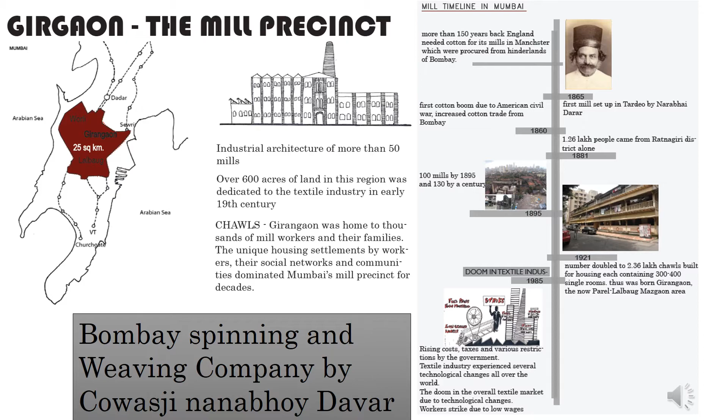Redevelopment of mill lands: in 1990, DCR 58, that is Development Control Regulation, came into existence. The mill owners were allowed to change the use of the mill from industrial to residential or commercial.

The map shows the location of 52 mills in Girangaon that establish a unique fabric of this region. Mills, workers' housing, and worship centers are some of the dominant elements in the urban characteristics of Girangaon.

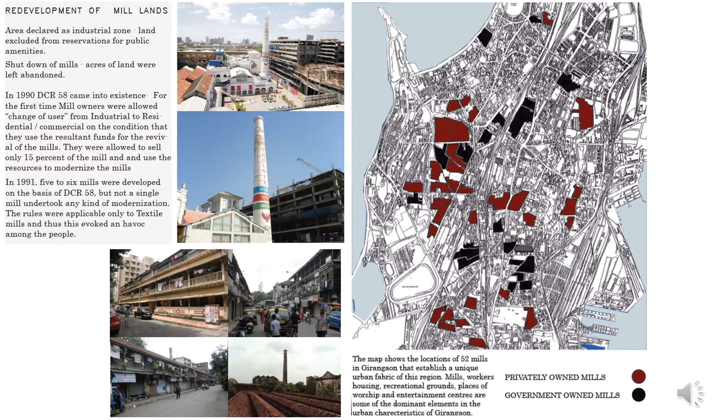The project takes into consideration a district that covers 7 mill lands in the heart of Girangaon. This region lies between two of the most important artery roads in Mumbai, the Eastern Freeway and Eastern Express Highway. Out of these, New Hind Textile Mill and India United Mill Number 5 are already developed. The other mills have individually proposed plans.

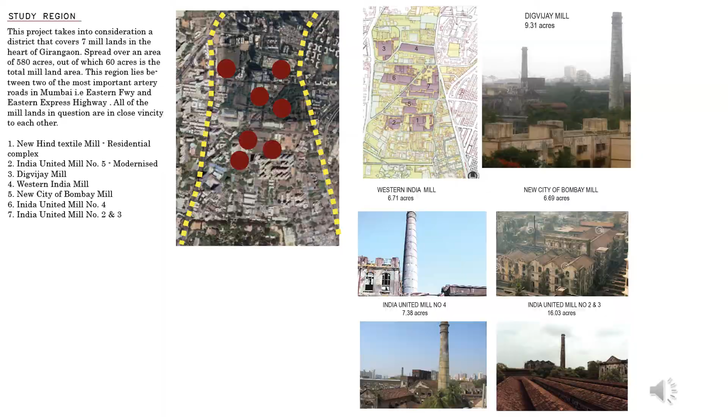Why India United Mill 2? It has a large site area as compared to other mill sites. It has a strategical location to railway stations and roads. It is ideal for a public space due to its environment. It is the first mill structure to be part of Mumbai's heritage list.

Project feasibility: heritage conservation is a major factor in knowing about the architecture of a particular time period, as well as in promoting tourism. The 80-plus-year-old mill precinct is almost in ruins. The need to conserve it becomes relevant as it is one of the best examples of Victorian mill architecture. As both India and the mill have a history on textile, they could both be combined in reviving the mill precinct.

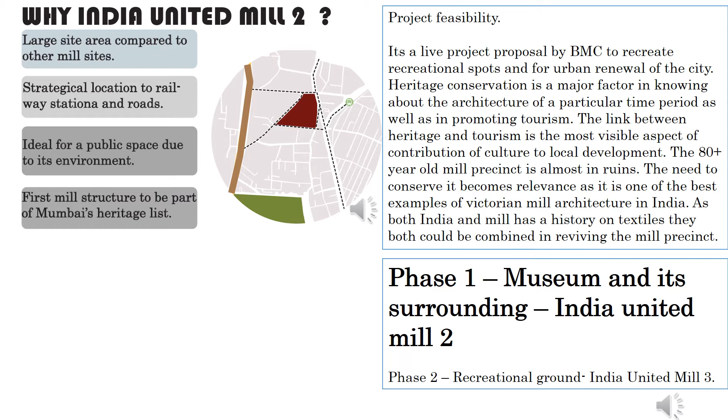It is a live project proposal by BMC to recreate recreational spots and for urban renewal of the city. The development is under two phases: Phase 1, museum and its surrounding, India United Mill 2; and Phase 2, recreational ground, India United Mill 3. The project takes under consideration phase number 1.

Aim: the aim of the project is to explore the possibilities of adaptive reuse in converting an old mill into a recreational zone along with the textile museum. Objectives: to convert the existing mill precinct into a new neighborhood which has its own distinctive new characters and ambience along with the retained character.

To identify the possible structures that can be retained in the mill precinct. To assign new uses for the retained structures. To identify the new design language that can be incorporated with the existing structure.

Scope: the study aims to cover the conservation of the textile mill and adapting it to a recreation zone. It also includes designing of spaces which will educate people about textiles but also connect them to textiles by means of workshops and activities.

Limitation: the design should adhere to the existing site conditions. The project does not go in depth about the structural system and details. The detailed planning would be limited to 10,000 square meters. The new design language should go with the existing ones.

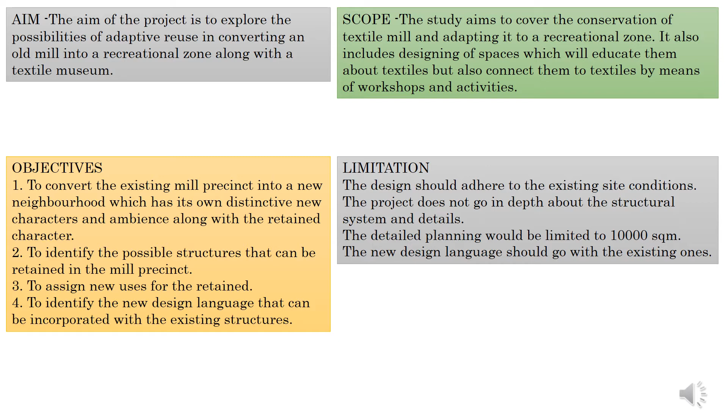The site is located at Kalachowky, Byculla East, Byculla, Mumbai, Maharashtra, India. It is located at a mixed use area approximately 900 meters away from Cotton Mills railway station. The adjacent road has a minimum width of 9 meters.

The Tukram Bhikaji Road connects to Eastern Express Highway and the Rambhau Bhogi Marg connects to the road that leads to Eastern Freeway. The nearest landmark is Mumbai Central, which is 3.8 kilometers away, and the Chhatrapati Shivaji Terminal is 5.7 kilometers away, followed by the Chhatrapati Shivaji Airport, which is at 15 kilometers from the location.

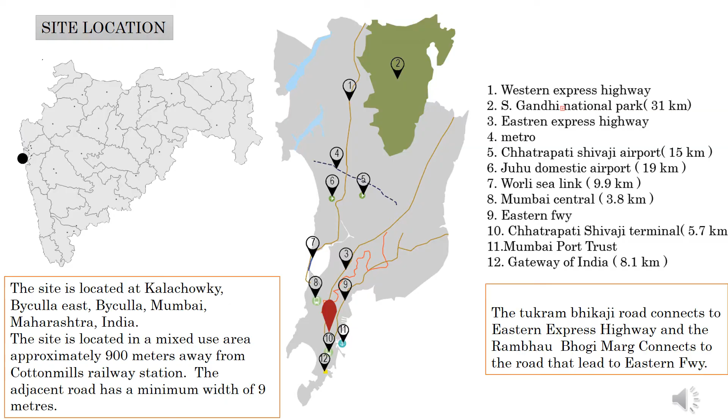India United Mill 2 and 3 was earlier known as India United 2 and India United 3 respectively. The site consists of mill structures of 80 to 25 years of age. It is owned by Brihan Mumbai Municipal Corporation. The site is significant for its historical, social, and mill culture. The structures are done in colonial industrial architecture.

The site shows signs of water seepage, broken windows and doors, damaged load bearing walls, roof leakage, damaged beams and columns. The site is encroached by laborers and destroyed due to heavy wind and rainfall.

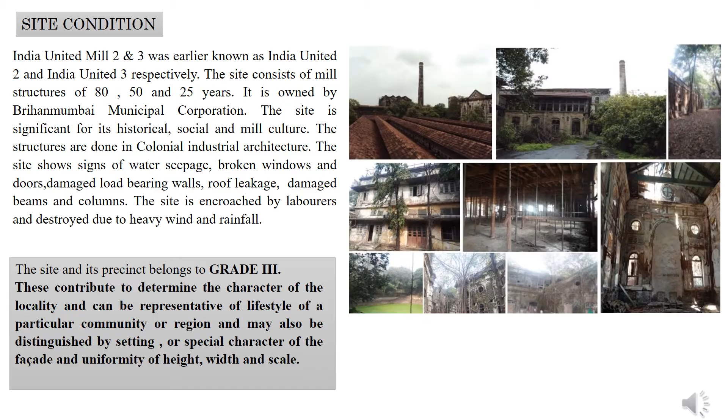The site and its precinct belongs to Grade 3 according to Heritage Conservation status. These consist of buildings that determine the character of the locality and can be representative of a lifestyle of a particular community or region, and may also be distinguished by setting or special character of the facade and uniformity of height, width and scale.

Site and surroundings: the site is surrounded by other mills of similar typologies, chawls and mixed-use buildings which have been adapted from the existing ones. According to the Master Plan of Greater Mumbai, the site and its surroundings belong to the urbanization zone with commercial and mixed-use development.

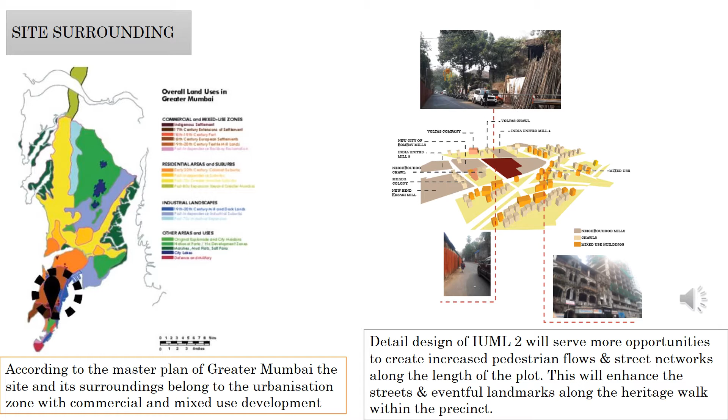Right now, the site and its precinct is pretty much abandoned with very little activity and pedestrian flow. The detailed design of India United Mill 2 will serve more opportunities to create increased pedestrian flows and street networks along the length of the plot. This will enhance the streets and eventful landmarks along the Heritage Walk within the precinct.

Sun and wind analysis: the predominant wind direction is from the northwest, and towards that part of the site there are fewer buildings of height, varying from 4.9 meters to 9.8 meters. This allows more breeze to enter the site.

Noise analysis: the junction at the southeast side is a point of high traffic as it is where most of the retail shops, vendors, and mixed-use buildings are situated. But the abundant vegetation on the site reduces the effect of the surrounding traffic.

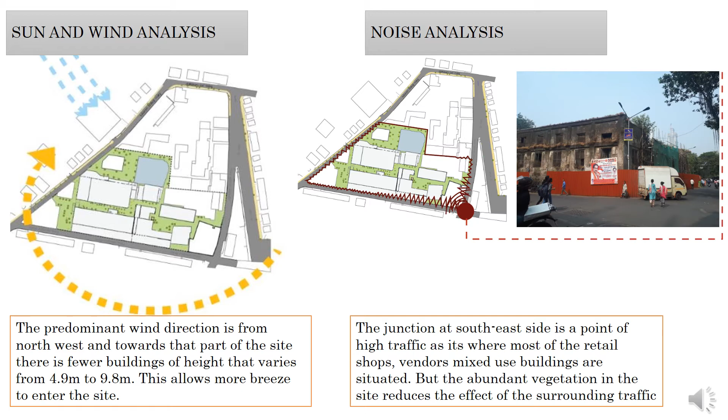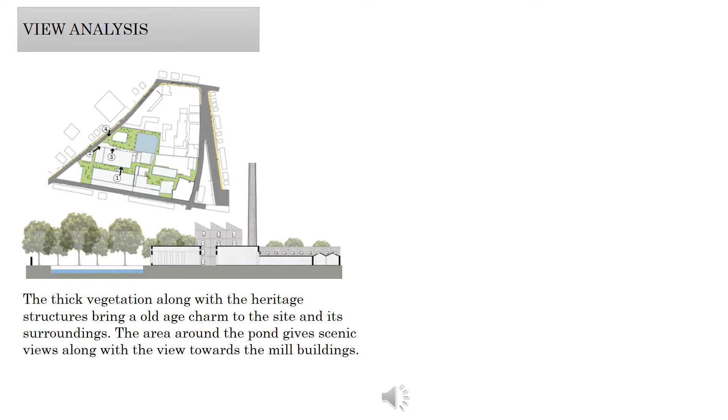View analysis: the thick vegetation along with the heritage structures bring an old age charm to the site and its surroundings. The area around the pond gives scenic views along with a view towards the mill buildings.

The main entry to the site is from the southwest side, and it has two other service entries from the northwest and southeast. The buildings are all oriented in the east-west direction, which calls for the least amount of openings on the east and west side.

Godown, offices, ring and spinning, weaving, semi-auto loom and sizing department, baling department, chimneys are the few functions for which each block is assigned. All the blocks are huge and mammoth in size, and each of these areas varies from 500 square meters to 8,000 square meters.

Each block consists of a set of lattice columns and beams which vary according to the size of the machineries that is being kept.

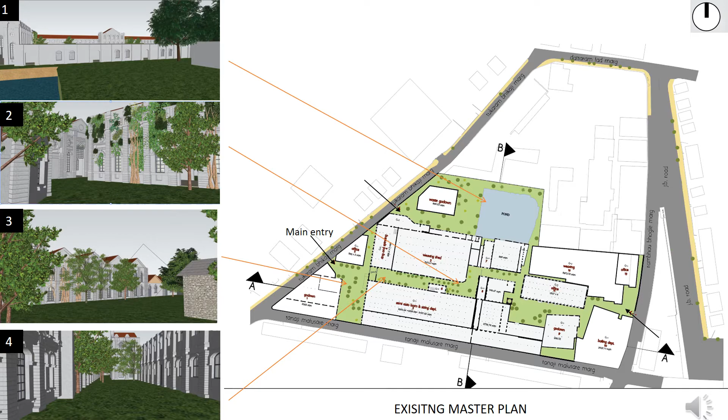The section AA is from west to east, cutting through Godown, semi-auto loom and sizing department, Godown, and baling department. The section BB is from north to south. Each floor height measures 4.8 meters, and the chimney goes up to 45 meters.

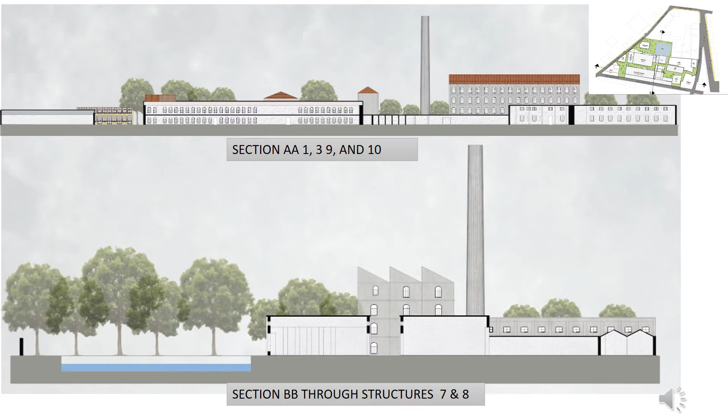The most common type of roof found is the M-shaped roof. The other varieties are the north light and flat roof. The Victorian style facade consists of elaborately decorated columns and windows.

The window height ranges from 1 meter to 3 meters. The width mostly is 1.5 meters. The height of the windows from the floor varies from 50 cm to 80 cm and 2.2 meters, depending on the functions of the block.

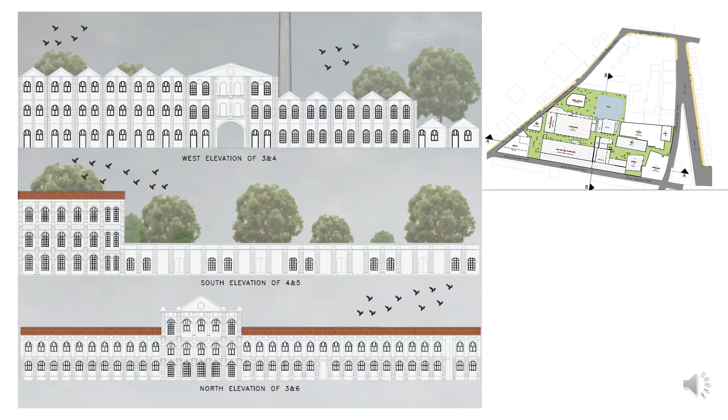The site consists of about 110 trees of height varying from 3 meters to 25 meters. Ashoka, Peepal, Indian cherry and Umber are the trees in more numbers. The other varieties include Putranjiva, rain tree, Ratangunj, Bokeda, Ficus racemosa, Jungli badam, etc.

The most commonly used materials are double glazed glass for windows, wood for rafters, Mangalorian tiles for roof, plaster and stone for walls, and cast iron for columns, windows and door frames.

The suggested framework by INTACH-Gujarat was used to analyze the heritage status of each building. It consists of 5 broad categories: context and location, significance, age, unique architectural features, and state of conservation, and each category has a certain amount of value towards it.

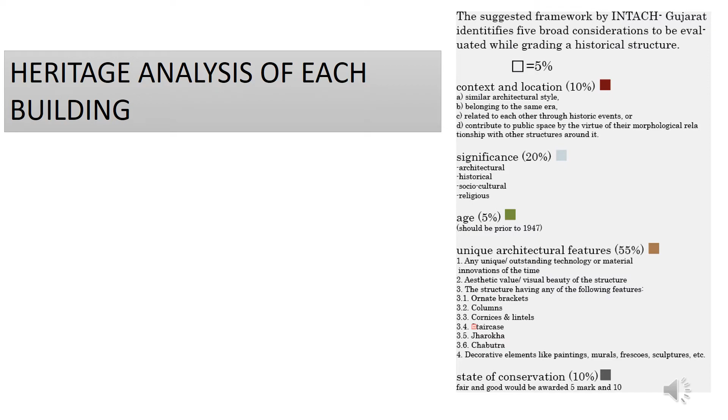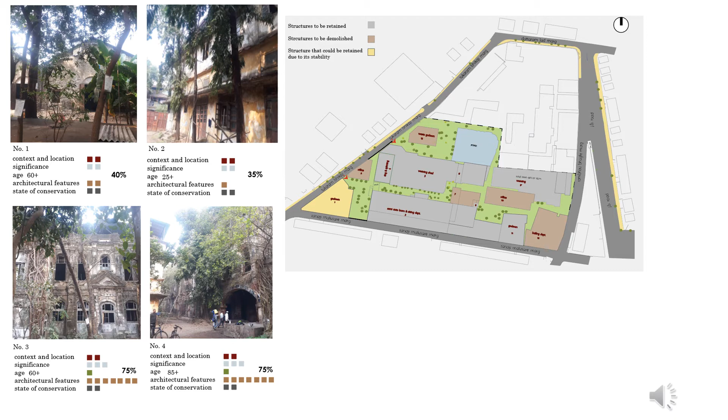Structures 1, 2, 3, and 4 were analyzed, and it was found that 3 and 4 were of immense importance. Structure number 3, which is currently the semi-auto loom and sizing department, is about 60 years of age, and structure number 4, the ring and spinning structure, is about 85 years of age.

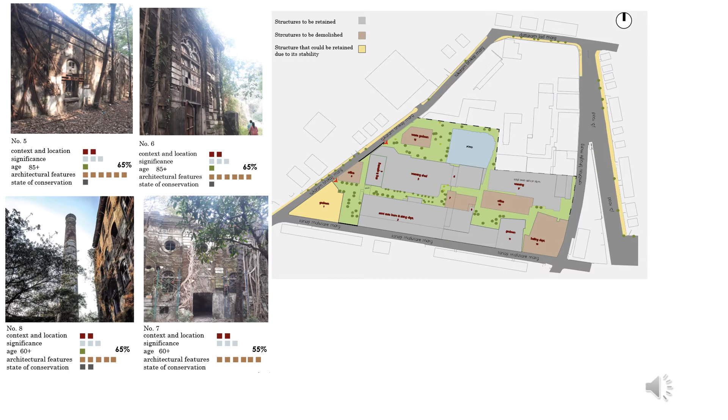Among the structures 5, 6, 7, and 8, structures 5, 6, and 8 were of importance. The structure 5, currently the weaving shed, is 85 years of age. The chimney, that is structure 8, is about 60 years of age, and structure number 6 also is about 85 years of age.

Structures 9, 10, 11, 12, and 13 were analyzed, and from that, structure 11, which is currently the godown, was the only one to be retained. This is because all the other structures were in a poor state of conservation.

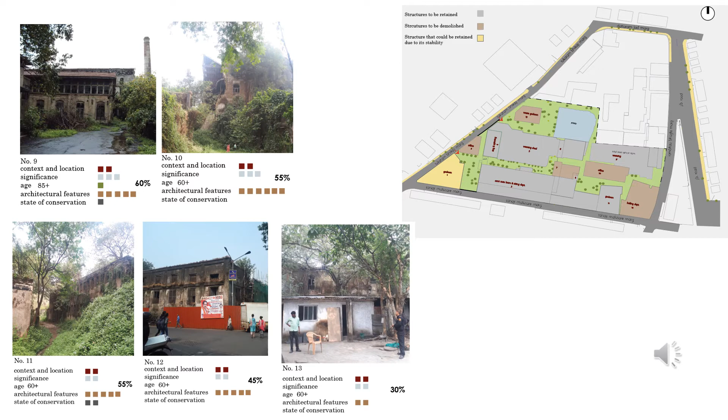From the analysis, it was found that structures 3, 4, 5, 6, 8, 9, and 11 were the only ones to be retained. Structure 1 could be retained. Structures 2, 7, 10, and 12 were the ones to be demolished.

The concept or design approach chosen was 'In the Style of Original' by Eugene Viollet-le-Duc. It means modern interventions can be done in such a way that they are recognized as such, to avoid misunderstandings about the historic and artistic value of the building. Yet the interventions done are in the original style of the building.

Figure 1 shows the original site plan. Structures 2, 6, 8, 10, and 16 are removed because they are too weak to adapt structurally or didn't have heritage value. The yellow color shows structures that can't be adapted for any function but can be used as a decorative element due to their aesthetic appearance. The black color structure shows a unique structure on the site that can't be preserved due to its poor state of conservation.

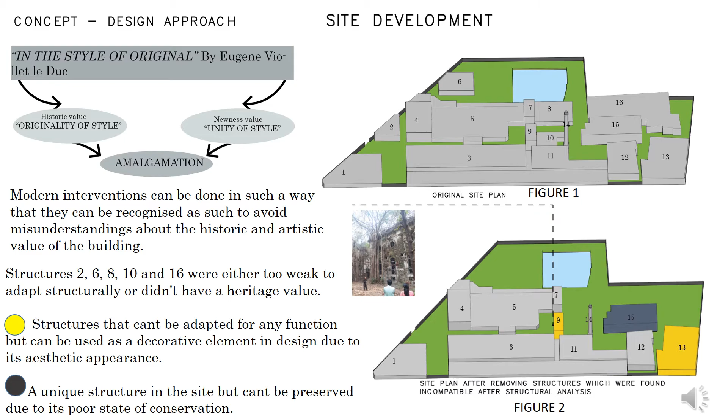Zoning is done to assign new functions to each building. The main entry for museum visitors is provided from the west, distinguished by its facade. In order to get a spacious front view, unhindered by parking, parking was provided in the basement. Since it is not possible to give an existing structure a basement, structure number 1 was removed.

Structure number 2: the large monolithic structure, flexible in open plan, with minimum sunlight entry, a strategic position at the main entry, and most of its existing features intact, makes it suitable for a museum.

Structure number 3: the building for the auditorium was chosen so that it can be part of the museum as well as an independent entity. It is also a structure that can be accessed from both entry points.

Structure number 4: the service center. The double height structure, located at a considerable distance from the museum perimeter and the public, is ideal for the service location. It is also one of the double story structures, but used as a single floor.

Structure number 5: Research Center. It is the only 4-storied structure in the entire site, located at the rear end. Most of the workers would be accessing the railway station, making it easier for them from the rear end. The entry from the east can be used by workers since it is close to the nearby railway station.

Structure number 6: the strategic position near the water body and the double height volume of the space makes it ideal for a library. Structure number 8: Craft demonstration zone.

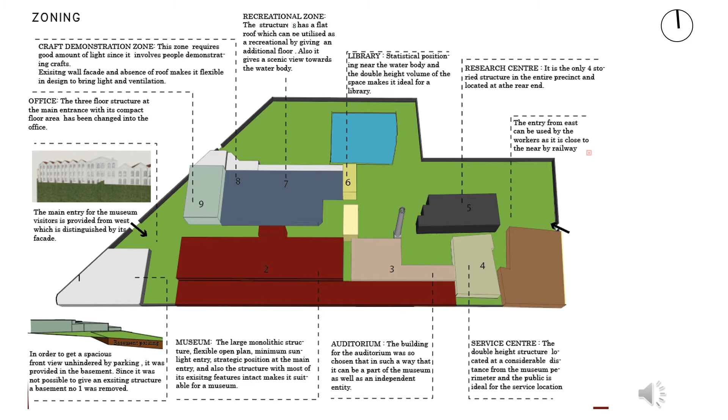Figure 1 shows the existing structure. Figure 2 shows the changes made to it. An additional structure was added on top of the existing one to emphasize the importance of the function of the structure, and also to create a double height space for the museum.

The southeast end was opened up for circulation. Since the structure needs a new replacement roof, the additional changes don't cause any material loss. The existing entry was used.

The zone was divided into 4 different areas. Since the museum doesn't require any natural light, it was placed closer to the southeast end. The auxiliary facilities were placed to the southwest side. Storage was placed right in the middle of the service zone.

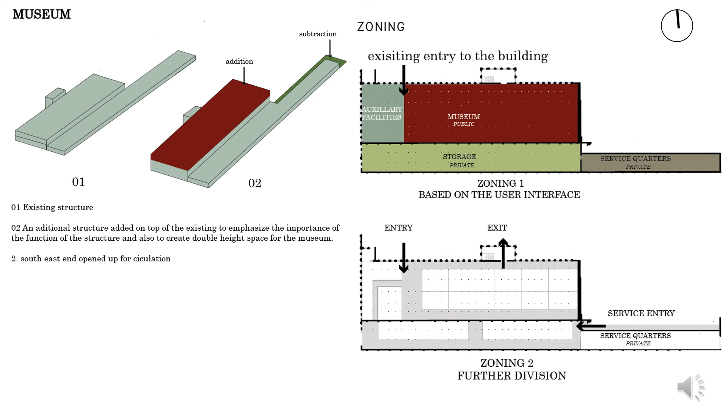The service area was placed closer to the southeast side because of the southeast entry. The zone was further divided based on a grid pattern. Since circulation and other facilities require light, they were placed closer to the perimeter of the structure — the craft demonstration zone and amenities. Figure 1 shows the existing structure.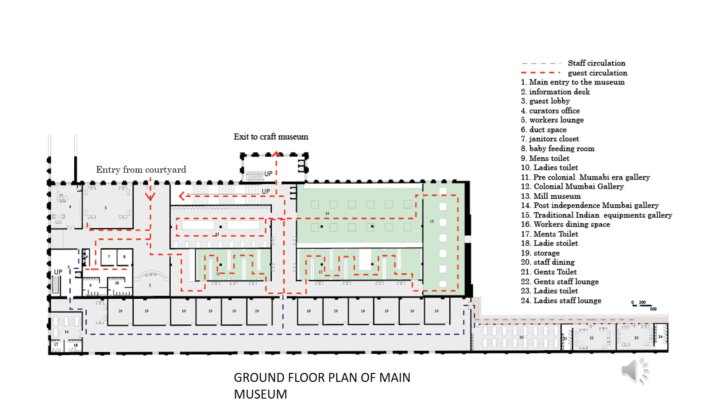This is done to ease the circulation of the workers. The exit from the main museum is kept directly in front of the craft museum so that one can easily find it without any confusion.

Types of exhibitions on the ground floor: in the pre-colonial and colonial era, the textiles are housed inside a 2-meter height box kept at 30 centimeters from the floor. This is done to get the eye level of the viewers at 1.7 meters, which is ideal. In the next typology, for the post-independence era, the exhibits are kept inside a cuboidal box since most of the exhibits are 3D objects.

Next is the mill museum, which houses the mill machineries. The mill machineries are kept on the floor itself and are kept inside a closed boundary.

The lighting for each exhibit varies according to the exhibit typology. In pre-colonial and colonial era, most of the objects displayed are 2D, so spotlighting is used to create a dramatic effect. In the post-independence era, 3D objects are displayed, and lighting is done at 30 degrees to create shadow and depth. In the mill museum, spotlighting is mainly used.

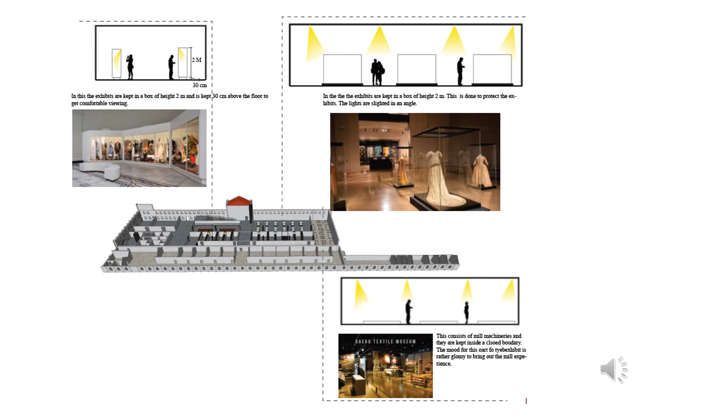The first floor can be accessed either through the lift or by the stairs. It has 2 galleries: the Indian fabric collection and the temporary exhibition space. The exhibits are hung as panels, and there is also a platform on which they could be placed.

In the Indian fabric collection, the fabrics are made to hang from the ceiling from a height of 9.8 meters. The light projectors are angled in a way that they create internal lighting from the exhibits.

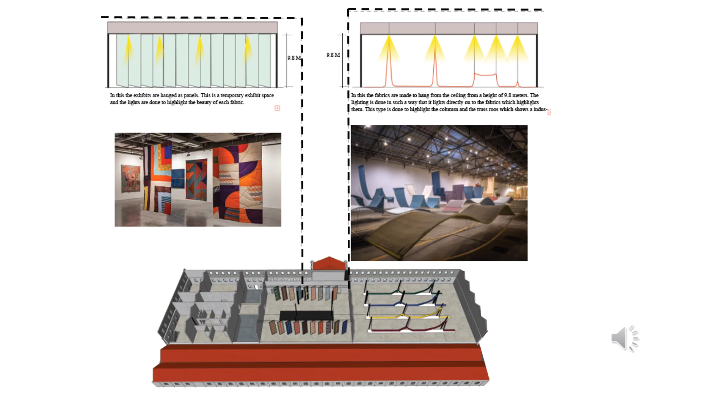The exit from the main museum leads one directly to the Indian Textile Craft Demonstration Museum. The existing grid pattern helped in dividing the place into a series of rooms, each with the various amenities it requires. The main units are embroidery units, ikat units, print textile units, and hand woven units.

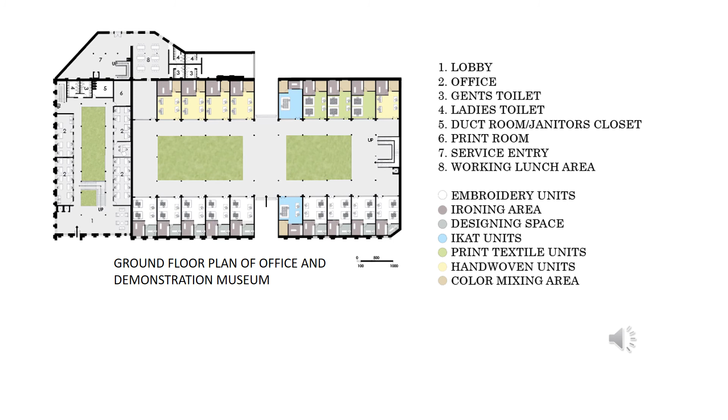The staircase on the east end carries one directly to the first floor. The office also uses the existing grid pattern. The first floor has 2 restaurants and 2 non-AC shops. The service entry for the restaurant is provided from the east end of the office, and near the office, all the restaurant staff can access each other's space.

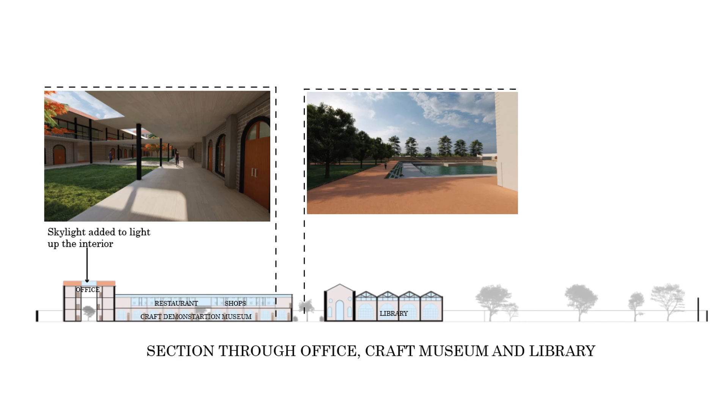In order to avoid water clogging, a small gutter is placed between the valleys. The gutter further leads to a pipe which collects the water into the rainwater harvesting tank.

The material used is cor-ten steel, known for its low maintenance, lower initial cost, speed of construction, attractive appearance, environment friendliness, and resistance to higher temperatures. The approximately 7 cm thick cor-ten steel panel is attached to a 23 cm wall. Traditional king post truss is mainly used for the roofing.

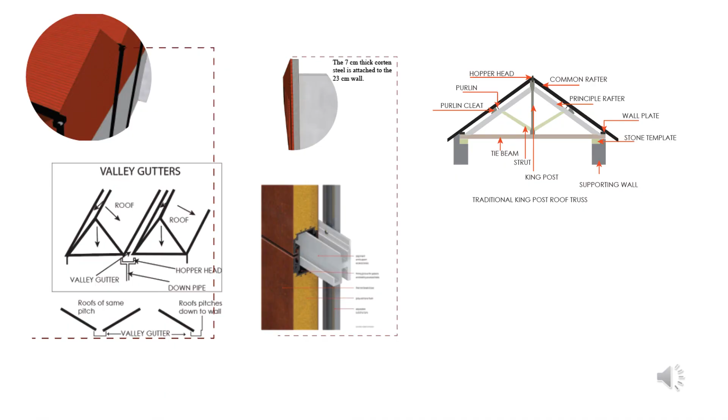Adaptive reuse was chosen as a special topic. Case studies were done on it, and the inferences gathered from the case studies were applied to the design.

For the museum, a stack parasite was used, that is, an addition was added onto the existing floor vertically. The windows added are of the same proportion but are given plain instead of any divisions, to differentiate from the existing. A sloping roof of the same height is given to maintain proportionality with the existing.

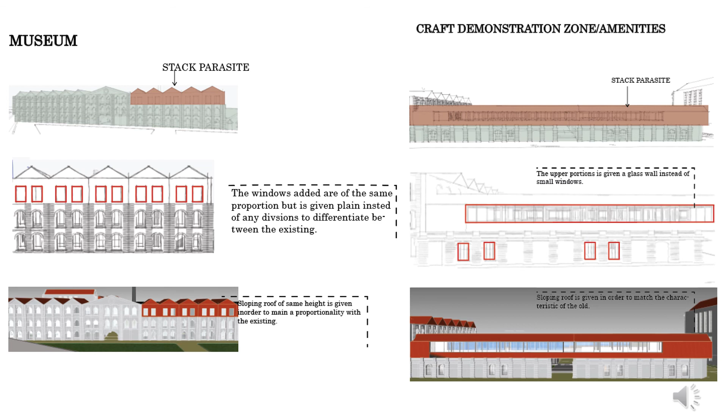For the craft demonstration zone, a stack parasite was again used. The upper portion is given a glass wall instead of small windows, and a sloping roof is given to match the characteristics of the old structure.

For the library, juxtaposition was done, meaning an additional volume was added horizontally. The windows are exactly of the same proportion as the existing.

For the auditorium, the stack parasite was done: a floor was added vertically. Instead of giving small windows, a divided curtain glass panel is provided to let in more sunlight.

Generally, the most commonly used type of intervention was the stack parasite, that is, adding an addition to the structure. Cor-ten steel, glass panels, and steel are mostly used to give a contrasting character with the existing, as well as to reflect the industrial nature of the site. Cor-ten steel is a corrosion-resistant material which over time gives an old, rustic character to the structure. The roof typology is kept the same as existing to give uniformity.

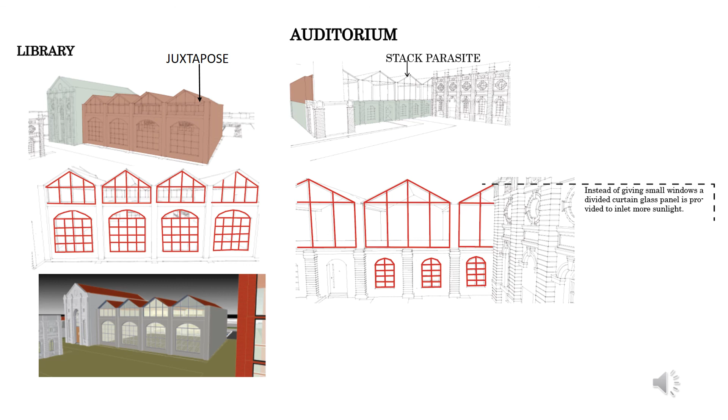Depending upon the function of the structure, the window size varied. In museums, the same as the existing is given, whereas in the library and auditorium it is changed, but the character of the existing is retained. For restaurants and shops, a complete glass facade is given to let in more sunlight.